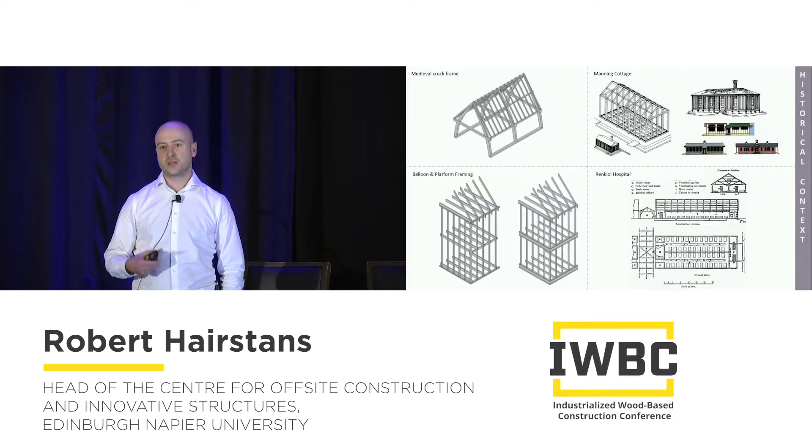Those drivers have obviously moved on in a sense, but we still have cruck frames - we just have CNC machining driven by computer-aided design and computer-aided manufacture. We also have things happening like the tallest timber building, timber reaching new heights with engineered timber products and mass timber. We have robotic collaboration, we have AI, etc. And with robotic collaboration working with humans, it's actually pushing the boundaries of the structural engineering behind these systems and starting to challenge some of the regulatory drivers.

We have NorScot, at the very top of Scotland in Wick - if you know Scotland at all, that's up near John O'Groats. They've invested in virtual reality and augmented reality, and the reason for them doing so is in order to inform the client and the consumer as to what that final house type would look like. So digitization is obviously affecting the delivery modes of offsite and industrialized construction.

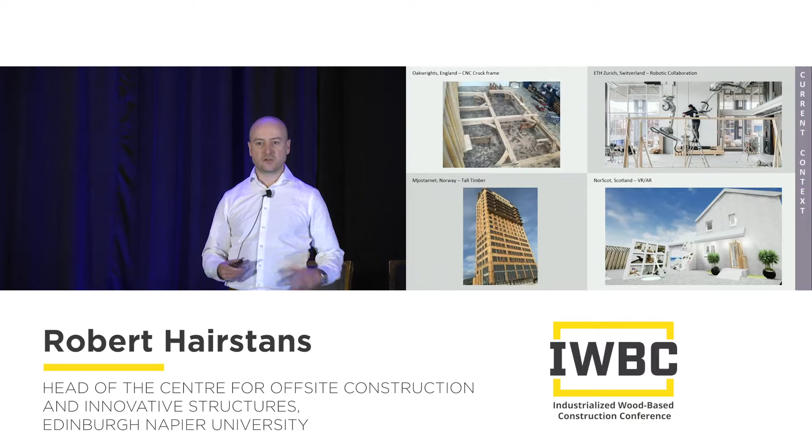So the drivers, in a sense, have changed over a period of time. Really interestingly, what we have at this moment in time is a swelling urban population and the need for housing and shelter with respect to that. It's been spoken of today in terms of the stagnation of productivity in construction relative to other industries. We have movements in that global market in terms of the growth, the potential growth of construction.

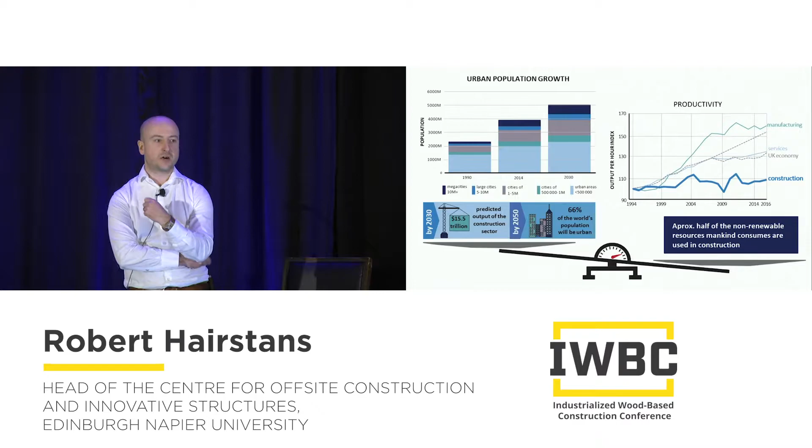But if we think of what that's offset by and the use of non-renewable resources, and ultimately what that would mean to the environment if that productivity actually went up, then what would that mean in terms of the future and our future generations? And I personally have young kids. So to my mind, we need to think about the tipping point, and we have to think about the utilization of natural resources and indeed timber and wood within the delivery of the built environment in order to sequestrate carbon, because it's fundamental to future generations and sustainability.

As much within the US, we have obviously what's happening in the UK. In the UK market, a 90 billion construction market. And in many respects, there's a government-driven agenda now behind off-site construction, and we can see some major investments going in that respect. We have obviously Sekisui investing, we have Top Hat, we have Legal and General, etc.

And the UK Construction Leadership Council has 3 focus areas in digital, manufacturing, whole life performance, which all resonate with industrialised timber construction. And obviously there's these 4 key drivers as well that the UK government are looking at with respect to that strategy 2025. And important to that is improvements in exports, and that's actually about reducing the import gap.

And then we have the Scottish context, which is quite interesting in response to that much larger UK market. And we have a historic backdrop of off-site construction and industrialised construction, largely focused on timber off-site construction, largely focused on panelised systems, and 85% of our houses are delivered in that manner.

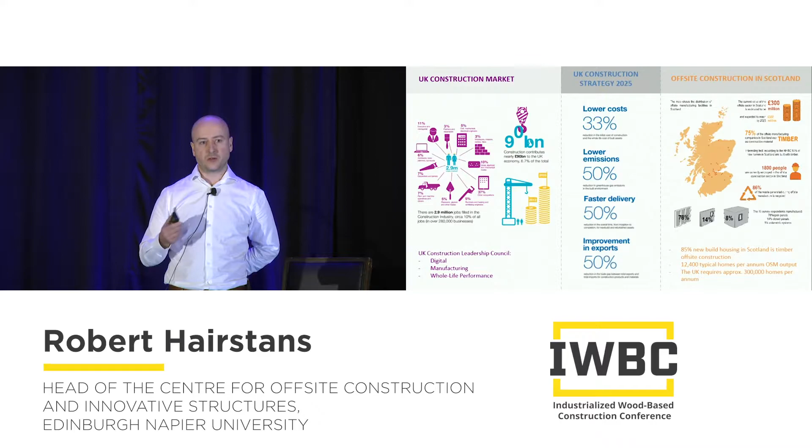So the key point I wanted to address there was the drivers now are slightly more complex. We have sustainability, the necessity to change construction culture to be less adversarial and to get more diversification. We need human capital and the skills that underpin it. We need to improve productivity, but we also have to think about the productive use of land and not just output relative to input. We have to think about digitization, and we have to think about the regulatory drivers as well,

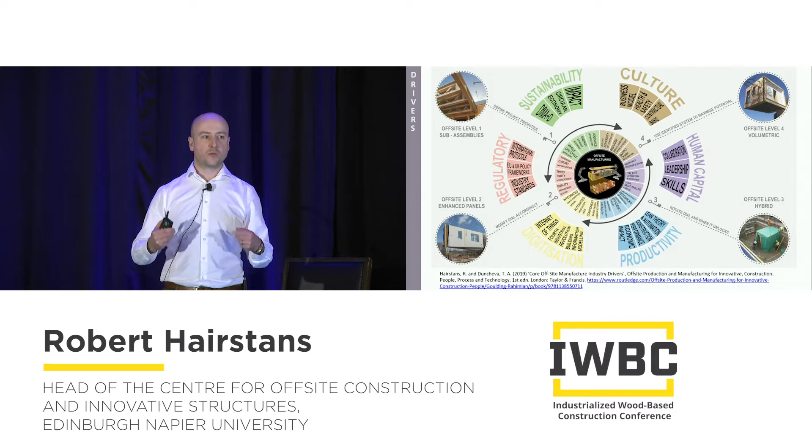and how those drivers correspondingly intersect and play out to the right form of construction, an off-site system, whether it be a sub-assembly, pre-manufactured, volumetric unit, enhanced panelised system, or indeed a hybrid type solution. So it's key that we think of those drivers and the intersect of them with respect to our decision-making process. So that's very much what I try to instill in the work that we do at Edinburgh Napier University.

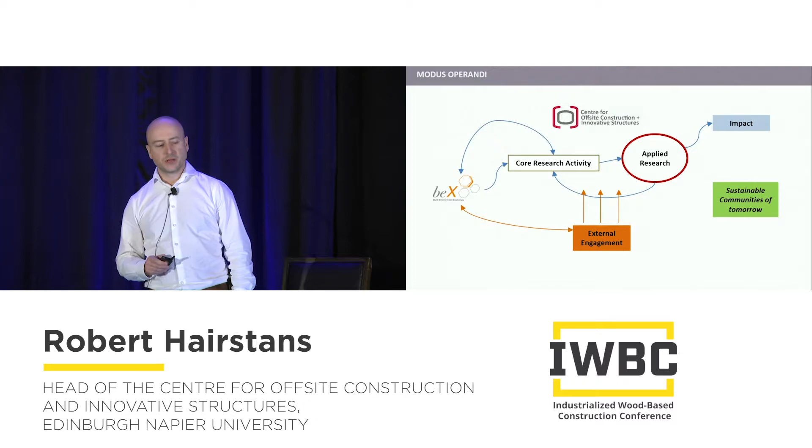And the research centre that I run is very much about applied research, creating impact to deliver these sustainable communities of tomorrow. But fundamentally, it is underpinned by student talent, because that is the next generation, and that's who will ultimately deliver that built environment. And we do that through something called a Built Environment Exchange, where we articulate students onto a program and then give them opportunities. And one of those opportunities is something we call Augmented Learning.

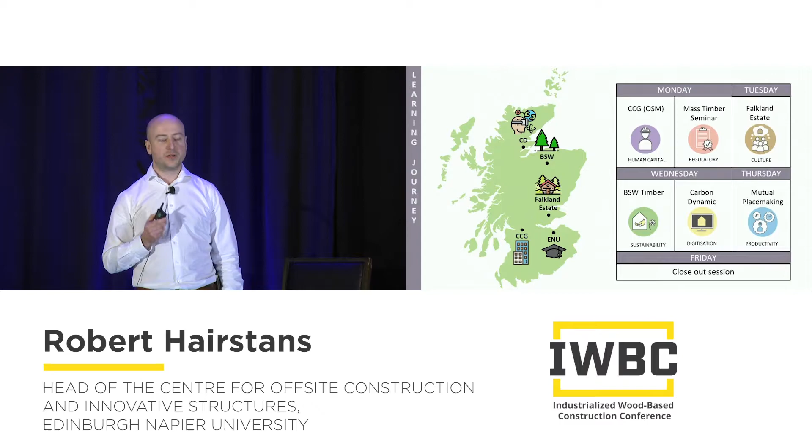And within that, over the last 2 years, we have collaborated with Harvard Graduate School of Design and their student cohort, and we've taken them on a learning journey throughout Scotland. And through that learning journey, we went to different destinations and focused in on each one of those drivers. So through the lens of each of the companies, we have looked at each of those drivers. So I'm going to take you through that learning journey pretty quickly, but hopefully I'll give you a sense of what they learned.

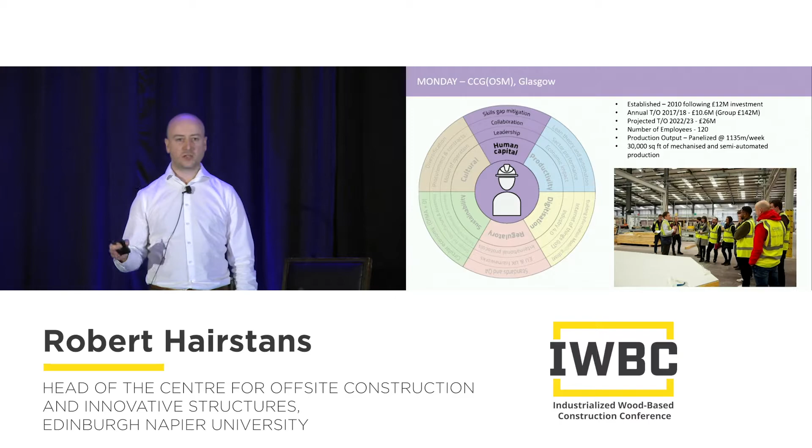We visited CCG in Glasgow, £12 million investment in off-site pre-manufacture, semi-automated mechanisation, and was taken around with one of my ex-students who's now employed there. We focused in on human capital because obviously they're looking to increase their output relative to the market. And with respect to that, they obviously recognise the necessity for skills from the factory floor to leadership at the top.

And they worked with us in collaboration with one of their competitors in Stewart Milne Timber Systems and developed skills material in partnership with ourselves to address both the factory floor and also on-site installation through video and animation content and creating modules. We recognise the need to push that out wider into the community and correspondingly created generic learning content which was endorsed by the Royal Incorporation of Architects in Scotland.

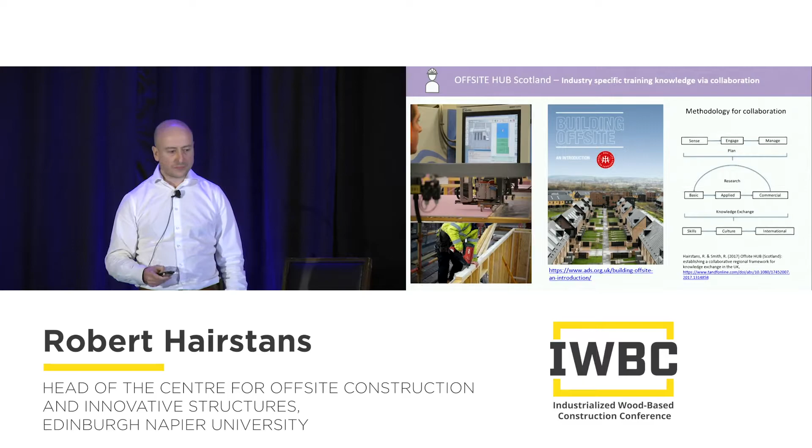Fundamentally, what was key within all of that, though, was really that collaboration, and we developed a methodology for collaboration. And where that methodology took us was, as Art spoke to, the creation of Offsite Solutions Scotland, which is a cooperative of off-site operators, all industrialised timber construction, the length and breadth of Scotland collaborating towards scale.

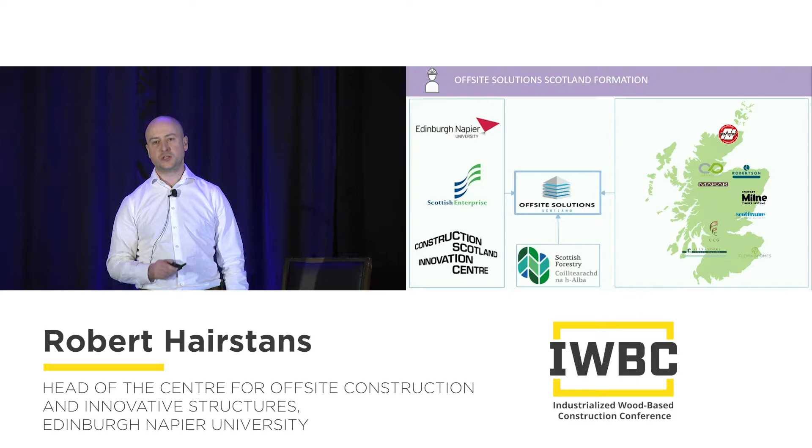We're academic lead. It links in with Scottish Enterprise and the Construction Scotland Innovation Centre and creates opportunities for further supply chain integration. As part of our visit to CCG, we also visited a site in Riverford Gardens.

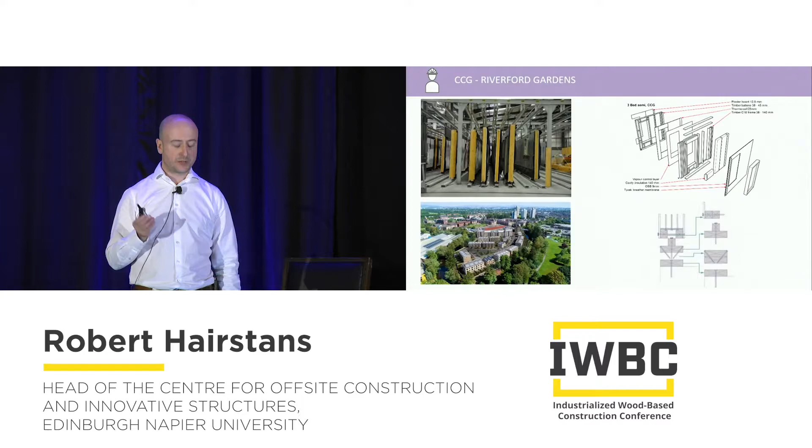And in this instance, still on this skills piece, we're actually looking at the harmonisation of the new regulations, the European Code of Practice, and the standardised detailing that we created working with CCG to allow closed panels to be received on the site while still ensuring that those systems could conform to the stability requirements, i.e. Eurocode 5.

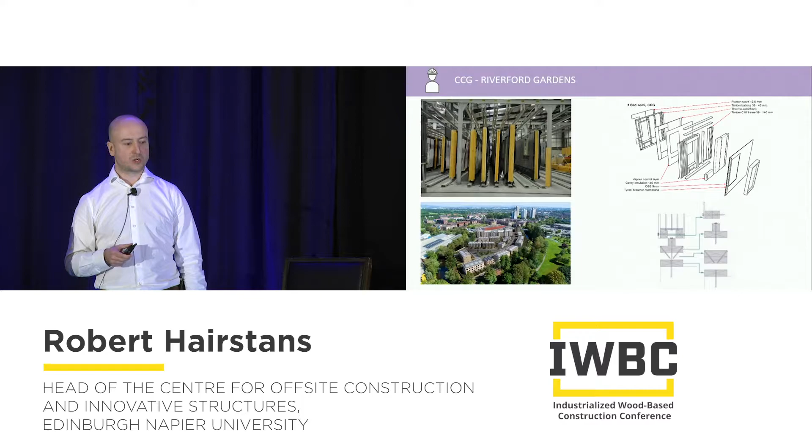So you can see some of the standard details that were evolved, and you can see those coming off the production line. So that was the first case study. That's Riverford Gardens. It's a 3-bedroom semi-detached house type in Glasgow.

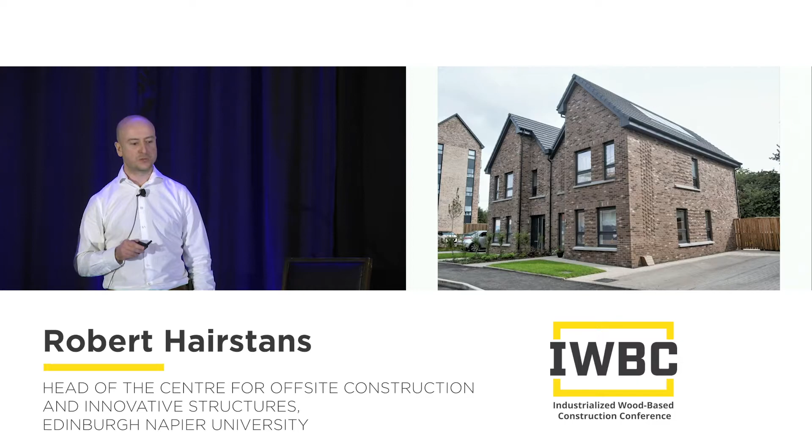We then returned to Edinburgh, and we had a mass timber seminar. And CCG, again, were one of the key delivery partners behind Yoker, the tallest timber building in Scotland, of a mass timber solution.

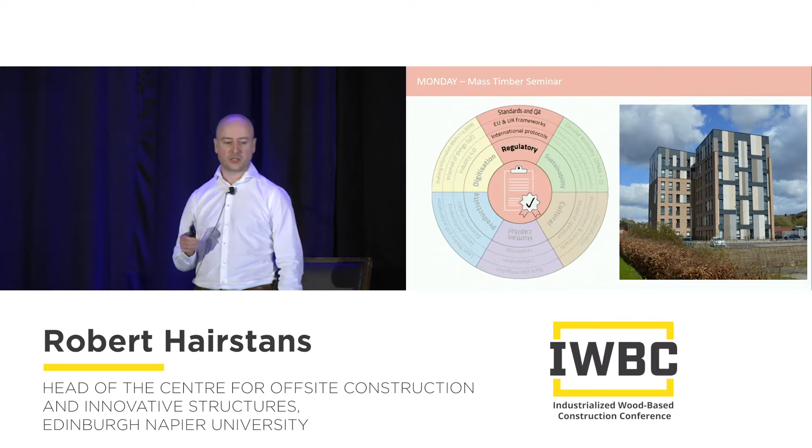But in this instance, the mass timber seminar in the first instance was more thematic, where we wanted to cover the generic content around mass timber systems, and not just look at the glued systems of CLT and glulam, but also look at the non-glued systems of dowellam or brettstapel, and how you can use the moisture movement in dowels to lock together lamellas to create a structural system, and also look at things like nail lam as well, which uses aluminium nails to facilitate CNC machining.

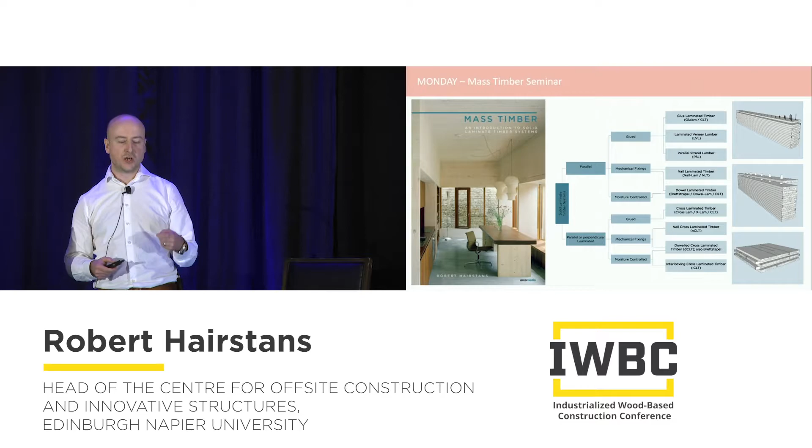So we covered all these different products, and hopefully informed the students as to how these different products could be utilised for varying contexts relative to the quality assurance and performance attributes. What we further did was then zone in using, again, case study content.

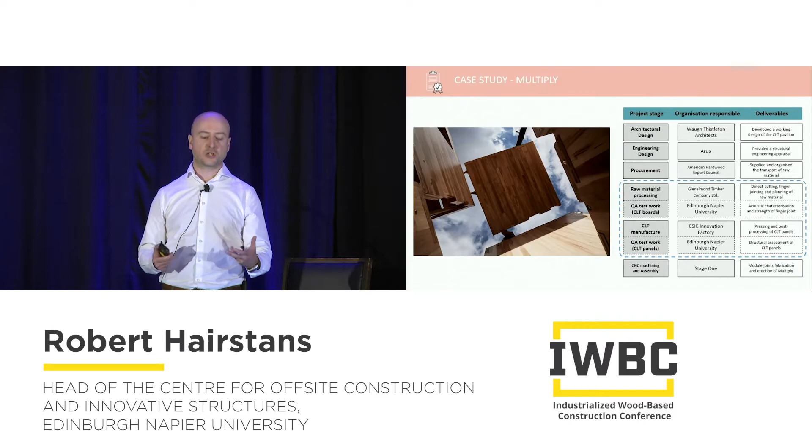And in this instance, we looked at a project called Multiply, American Hardwood Export Council, and the utilisation of tulip wood for Multiply. That was a Waugh Thistleton Architects-led design project with Arup Engineering. But interestingly, it was a Scottish supply chain that carried out all the product pre-processing of the material, the manufacturing of it at the Construction Scotland Innovation Centre, and we undertook the quality assurance test work.

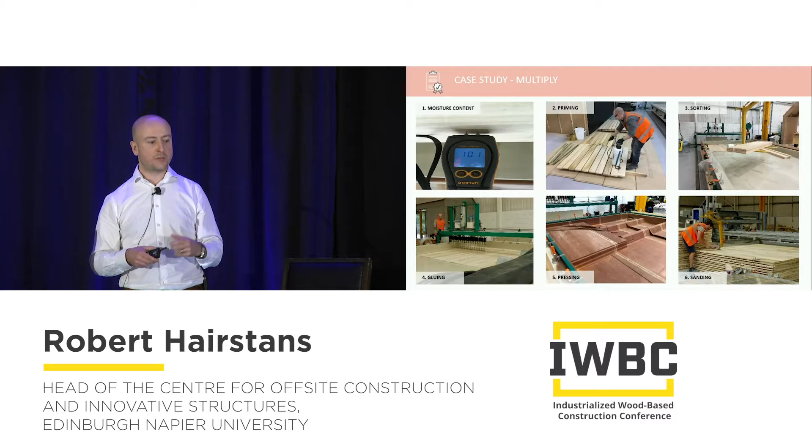So at the Innovation Centre through in Glasgow, they have a vacuum press, which allows not just CLT to be made, but other bonded timber systems such as glulam, because of the flexibility of it. And our role within that was to ensure the quality assurance of the material: the moisture content of the lamellas relative to each other, and also the grading of the material as it's being utilised within it, and overseeing things like priming of the hardwood species to allow the bonding to take place.

Once these panels were manufactured, we took a subset of that material, and we carried out a series of tests to ensure the finger jointing was of strength requirements, the bond strength, including rolling shear, bending out of plane and in plane, and then we compared that relative to the European product, and you can see how the tulip wood CLT compares to the standard European product for in-plane bending, i.e. when it's acting as a beam.

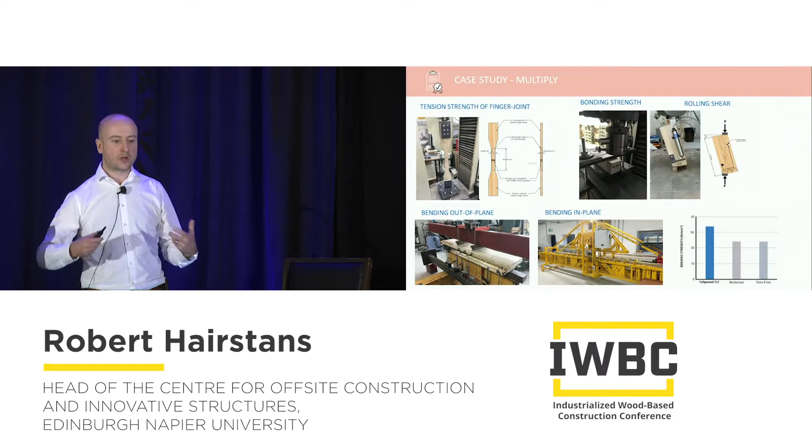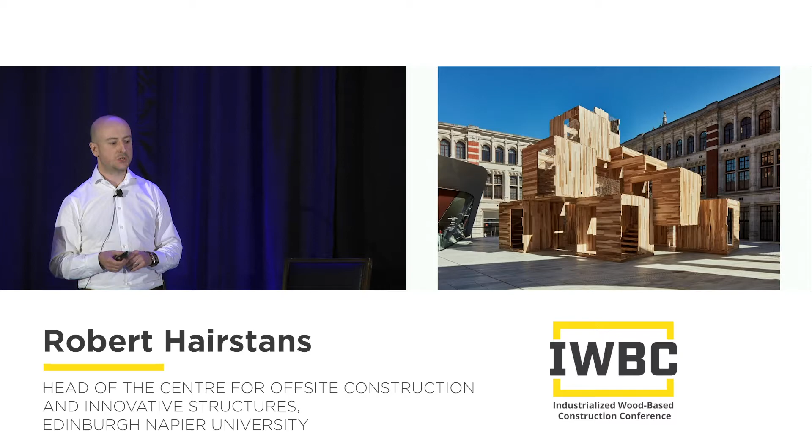And obviously all of that content then informed the second case study for the GSD students. So they got informed of all the technical attributes that sat behind it.

The next step on our journey, we travelled north. We went up to Fife. And in this instance, we wanted to look at the cultural driver and the cultural aspects of construction. And Falkland Estate is a really interesting culture. So Falkland Estate in Scotland is where Falkland Palace is. It's a 16th century building, stone built, I must add.

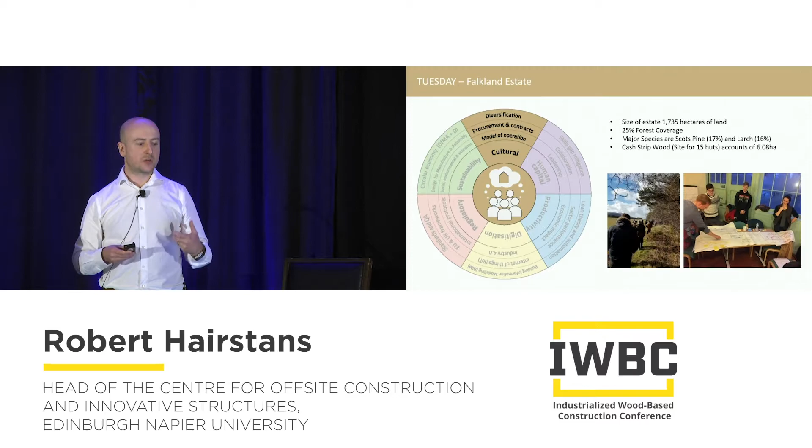But what's interesting about Falkland Estate is they're looking at a community ownership model, and within that community ownership on the estate, looking at the delivery of their built assets using the local timber resource. So they have a timber resource there, and how it could correspondingly be used to deliver their built assets.

And some of those built assets on that estate are to be off-grid recreational units, bothies in the Scottish terminology, or huts. And that's a simple form of accommodation, only to be used for recreational purposes, internal floor area under 30 square metres, and correspondingly has relaxed planning consent and building regulation requirements. So they're relaxed in order to allow these to be built without full planning approval.

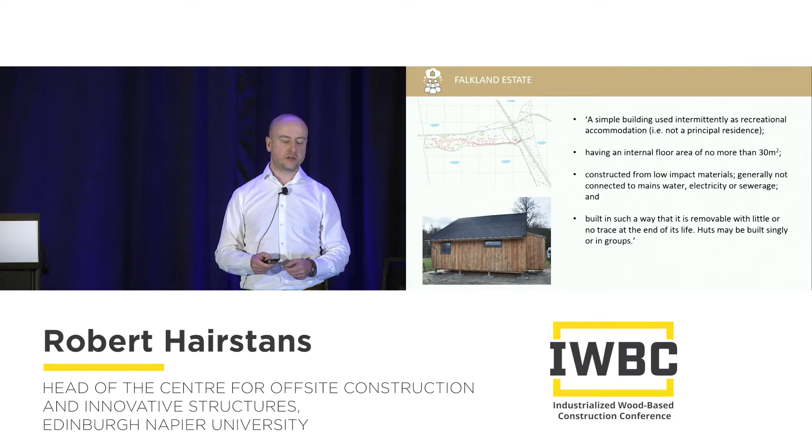And Ninian Stuart, who's the trustee of Falkland Estate, is very much behind this in a movement in Scotland to introduce 1,000 huts around the Highlands and other off-grid, shall we say, areas.

So our innovation intervention with this particular project was to create a digital model of the hut and a building information model. So using SketchUp, we had students through the Built Environment Exchange process create that building information model using SketchUp supplied by Trimble, as I say.

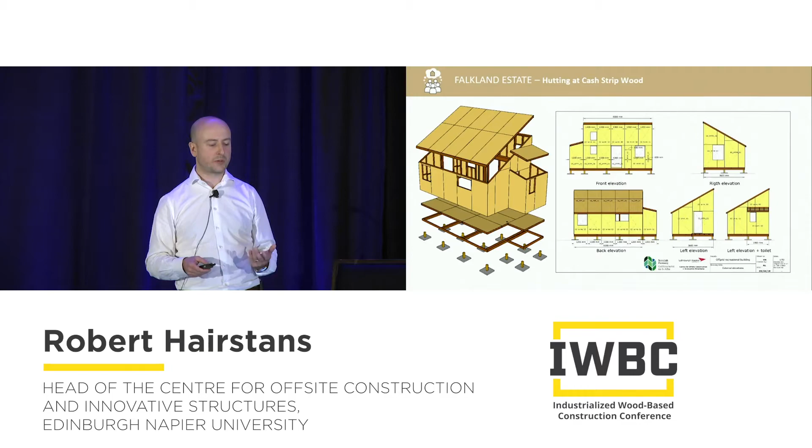And why that's really useful is it allowed our students to then create panels to articulate the panels for that fabrication. Because these huts ideally have to be erected on site by unskilled workers, i.e. the public, who want to have a recreational hut.

So if you can pre-manufacture the kit of parts off-site. The work that we did within that building information model was to put simple things like the density of the material in there, so you could understand the individual weights of these panels to facilitate manual handling. So they're under 50 kilos individually. And we also worked on the detailing of them to allow those parts to come together in a simple manner.

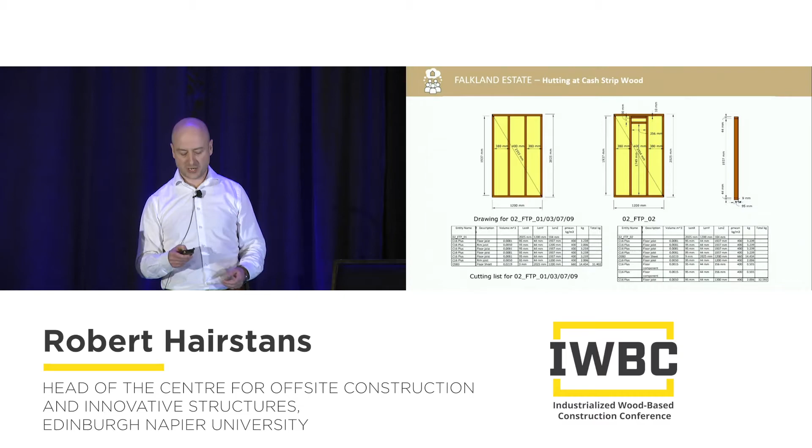And once they're erected, the individual can customize that through what types of insulation, internal lining, and external cladding. So mass customization in effect through a standard kit of parts. So that was the third case study of the GSD students.

We then traveled further north and we visited BSW Timber. BSW are the largest sawmiller operating in the UK, and they also have sawmills in Latvia. We wanted to go there to really focus in on sustainability, because there's not many industries that really have a zero waste policy, and that's exactly what BSW Timber do as a sawmiller. So they don't waste anything.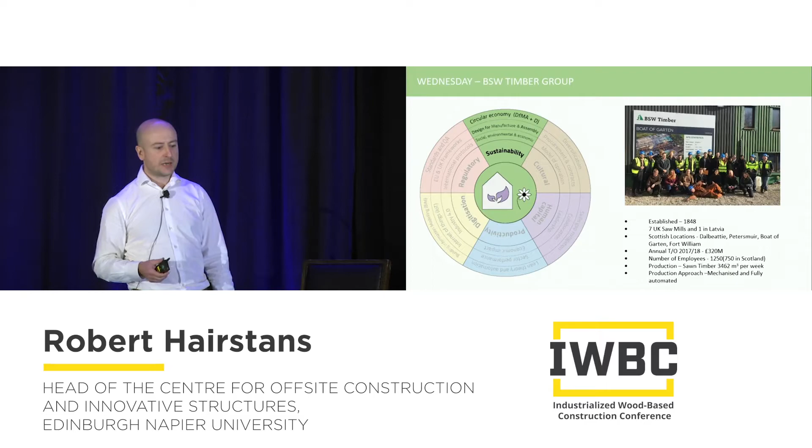So we wanted to take the students there so they could understand the industrialized processing of logs and how those logs are then turned into products without wasting any of the resource, and at the same time planting more trees than they're removing. BSW took the students around the sawmilling facility so they could understand the fullness of the supply chain.

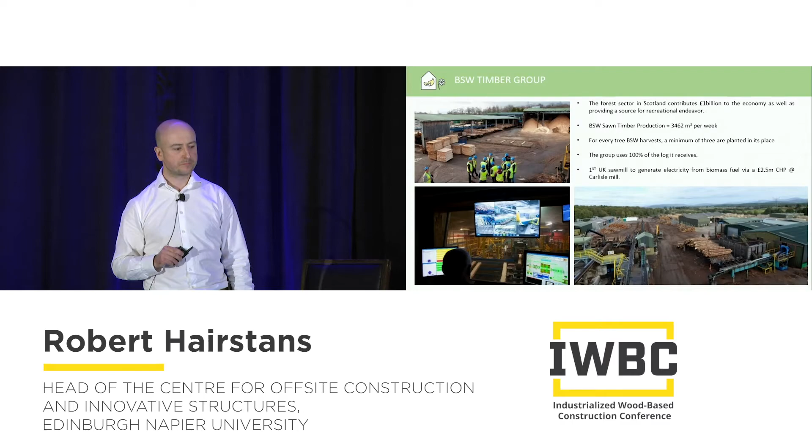What's useful about that as well is that BSW are representative of the UK timber market. And in that regard, what we're able to understand is the level of material that's utilised from the sawmill into construction. A lot of the work that we do at Edinburgh Napier is to try and enhance that 20% margin in order that more timber is used for construction purposes.

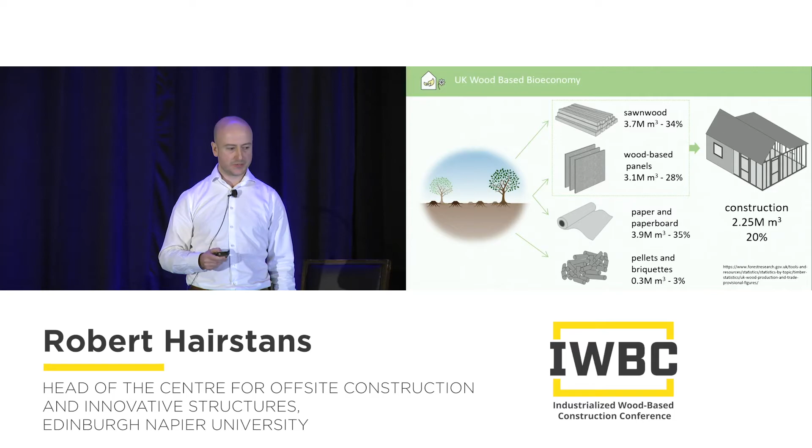And a large reason why we do that is because that chimes with the paradigm of the circular economy. Because evidently, the more timber that we can utilise in the built environment, carbon can be sequestrated for longer and locked in. And it's really at the end of life that we should be thinking about the utilisation of timber to generate power. So as much of that material that we can lock into the built environment, to my mind, the better.

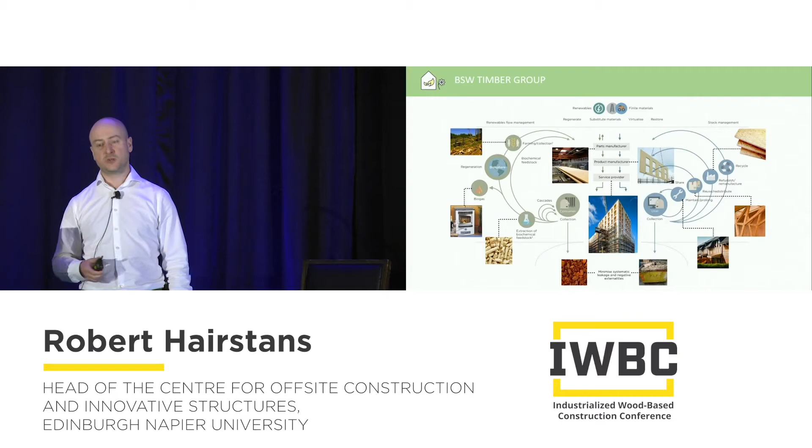So a lot of the work that we do with the sawmills is to facilitate how they can move forward into the circular economy. And what that requires is, once you have the sawn timber, to take into consideration design for manufacturing assembly, and of course disassembly, such that you can reuse that material at end of life.

So in this respect, what we've been doing a lot of, with colleagues at Edinburgh Napier, is to look at our resource and what limits its use. And often what limits its use is the preconception that it's of perhaps lower quality than imported resource. Our resource is generally stiffness limited in terms of grading criteria. But although it's stiffness limited, it actually has a higher density and higher strength properties within that grading class.

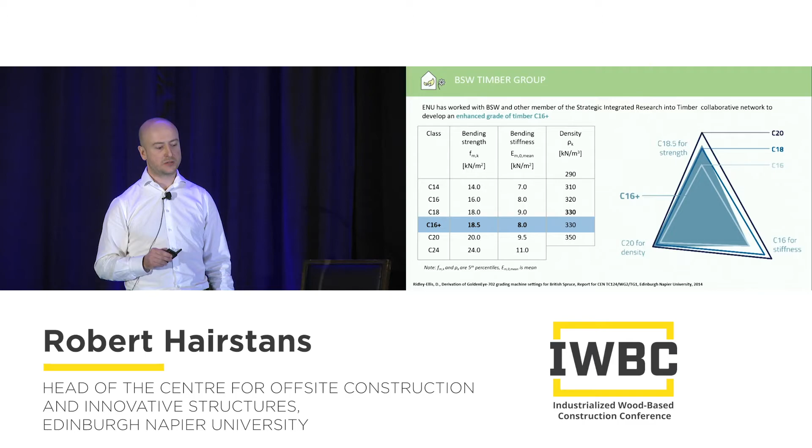And if you think about timber design from a structural standpoint, it's often connections which limit the performance of the system. If you have a higher density, then you have a higher strength and stiffness of your connections. So if you can utilize that higher density within your design, you'll get an uptake in performance and correspondingly a better utilization of the material, so further optimization. Hence why we've been undertaking work in this regard. And C16 Plus is now a recognized grade of timber within the UK.

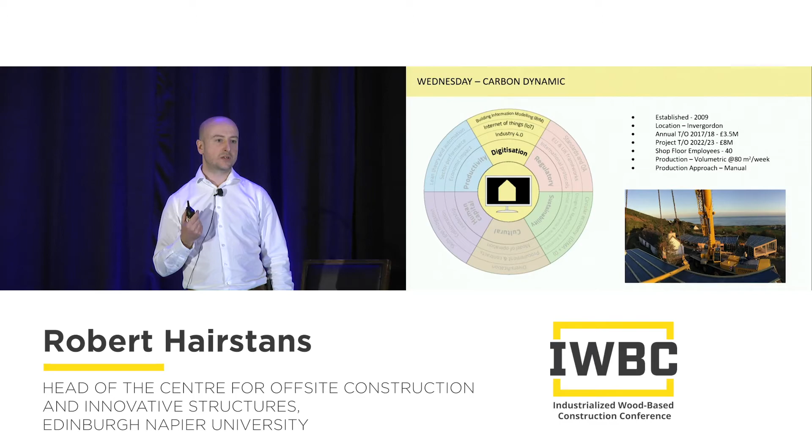Moving on from BSW Timber, we then went further north to Carbon Dynamic, a volumetric CLT manufacturer. In this instance we wanted to look at digitization, and we got the opportunity to understand the work they undertook to deliver the Dyson Institute of Engineering and Technology, and how standardized volumetric CLT units were used in an array of 78 modules to create their student accommodation block.

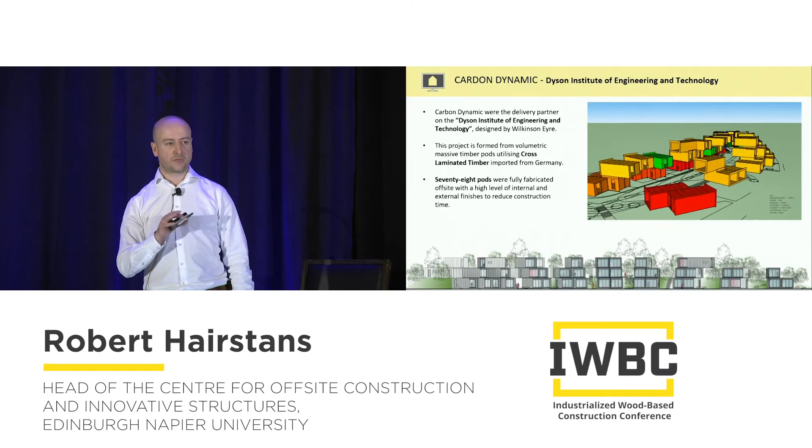Our students, through the BIM process, were able to draw these in SketchUp and create an animation of how those modules were utilized within the site. The different colors designate the different use classifications, with yellow being the accommodation units.

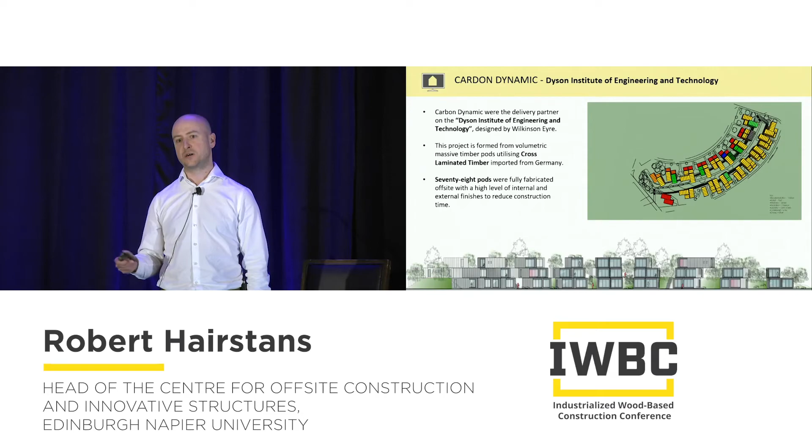Interestingly, Carbon Dynamic have further enhanced these digital modules to the extent of virtual reality and augmented reality, taking that on board towards augmented worker. So again, there's a skills context to it.

The work that we did with Carbon Dynamic in this instance was a lot to do with the necessity and want to cantilever these volumetric CLT units, and correspondingly push the boundaries of even where the regulations would allowably take it.

So what you're seeing there is a sort of student party in the bathroom, where you've got a whole series of individuals piled up, creating quite an extensive crowd load. What was needed was to understand what that would equate to in terms of deflection for serviceability criteria.

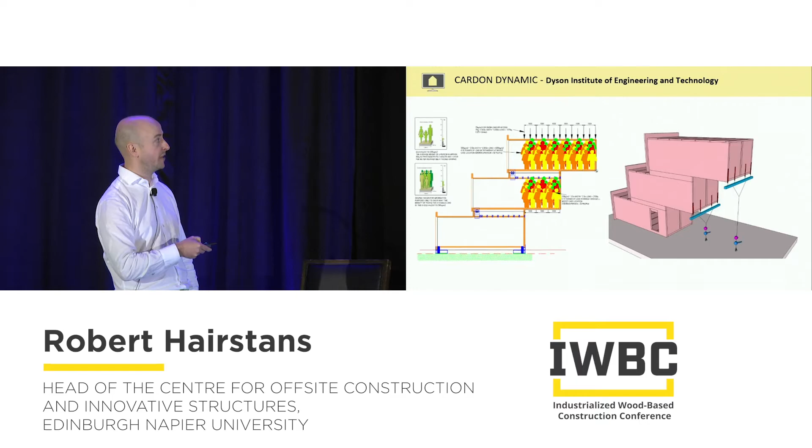So in order to do this, what you see on the right-hand side was to model that, then think of it in terms of point loads at the end, and create a test setup where you could apply a ratchet to the end of the cantilevered box to understand what that deflection would be. The reason why we did that was because they then undertook a full-scale test of the system.

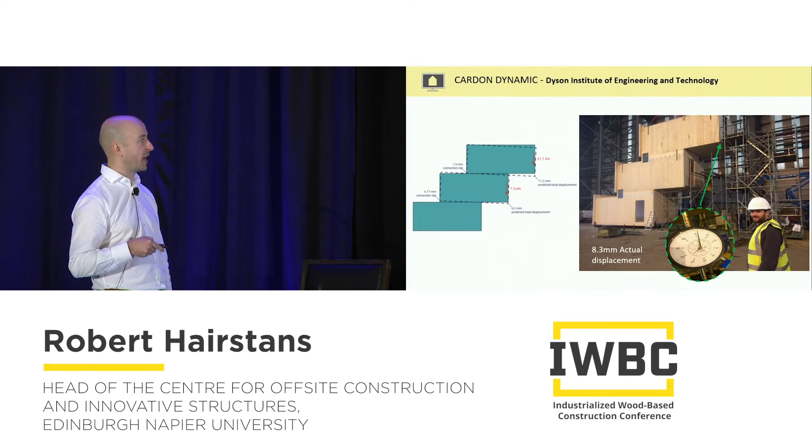You can see one of our proud students stood there, Rory Doak, who undertook the modelling of the system under our supervision and support. We were able to correlate, through dial gauge measurements, the actual deflection relative to the predicted deflection. So in that respect, you're able to create a feedback loop to the digital model to understand the structural attributes.

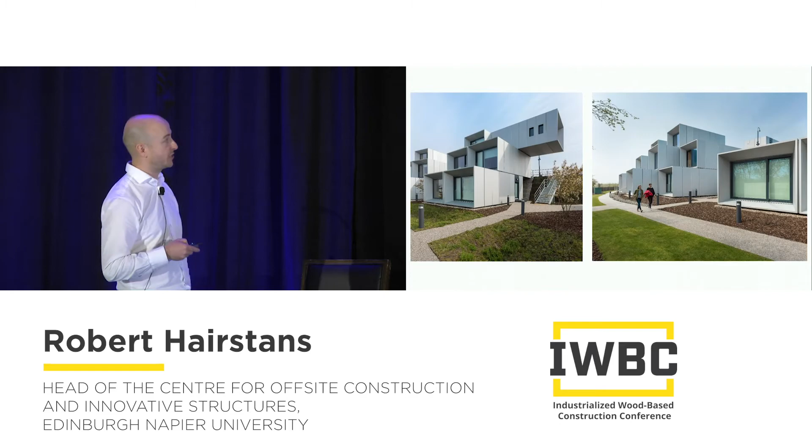And then you can see the fourth case study, which was taken on by the Harvard GSD students, in the Dyson Institute of Technology project. You can see quite categorically that the cantilever is working.

So we've touched on productivity, and that was very much the last leg of the tour. This time thinking of productivity slightly differently, about productive use of land. In Scotland, we have a lot of vacant and derelict land sites, which happen to be in urban areas. So it's about how these brownfield sites or discarded sites could be used for productive use.

There's 12,000 hectares of vacant and derelict land sites, or 3,600 of them. There's a task force in Scotland, which I happen to be part of, geared towards trying to halve the number of vacant derelict land sites and bring them back into productive use, so we're not eroding the green belt all the time.

And the vacant derelict land site that we looked at was right in the heart of Edinburgh. If you know Edinburgh at all, that's the Royal Mile, which takes you up to the castle and down to Holyrood Palace. Here is the main train station, and in here is the vacant derelict land site, situated directly behind a hotel.

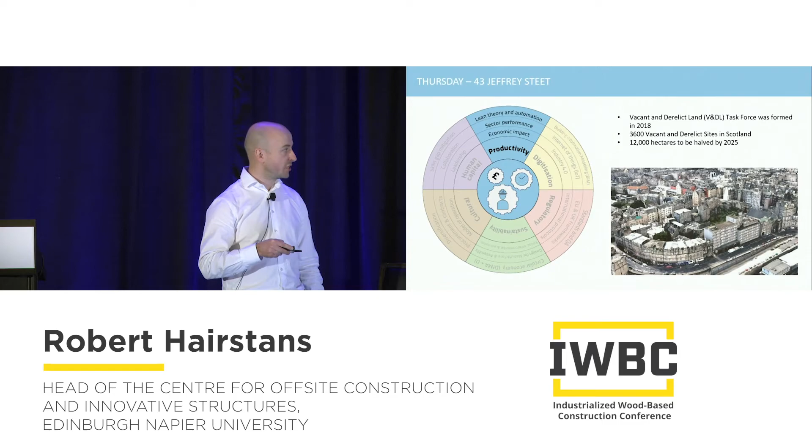So I had logistical challenges. But what we did was conduct something we call mutual placemaking. That's an immersive workshop working with our creative industries department, where our students and the GSD students undertook a design thinking exercise.

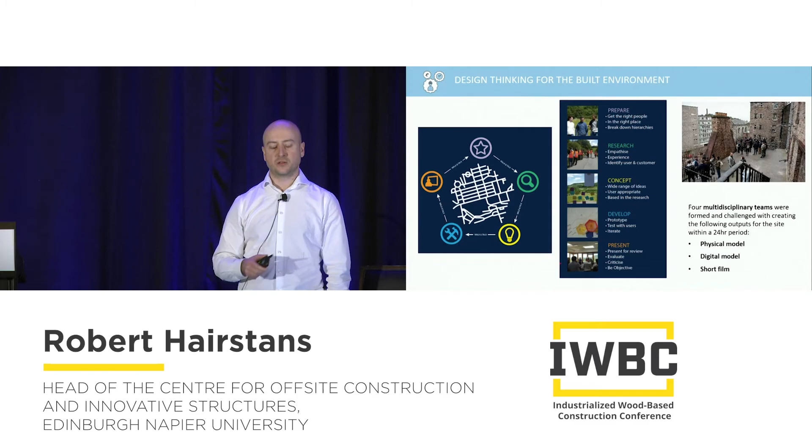What's key to that is community engagement right at the start, in order to inform the design solutions. We challenged the students, over a 24-hour period, to create a physical model, a digital model, and a short film of what could be done on that site to bring it back into productive use, bringing together architects, project managers, structural engineers and civil engineers right at the start with the community to evolve those solutions, utilizing the learning from the week.

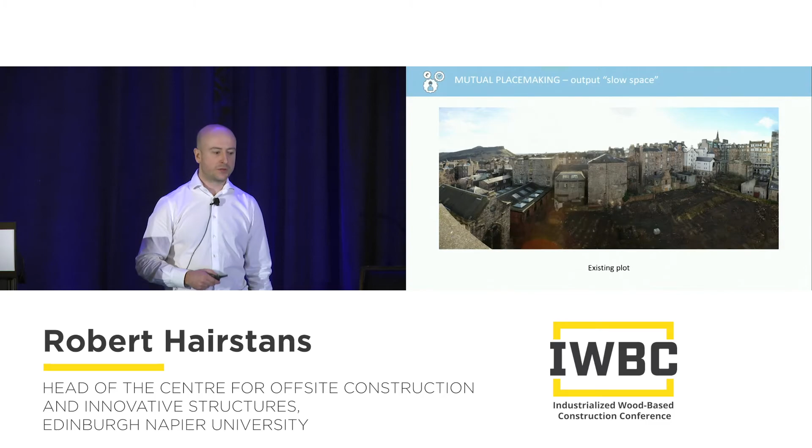So in that respect, the students rose to the challenge and indeed came up with some solutions. What's quite apparent here is, as much as it's in an urban context, there's a lot of green space that's been kept around it, because that's what was being spoken of from the community engagement piece. But of course, using off-site modular timber construction units for the delivery of that.

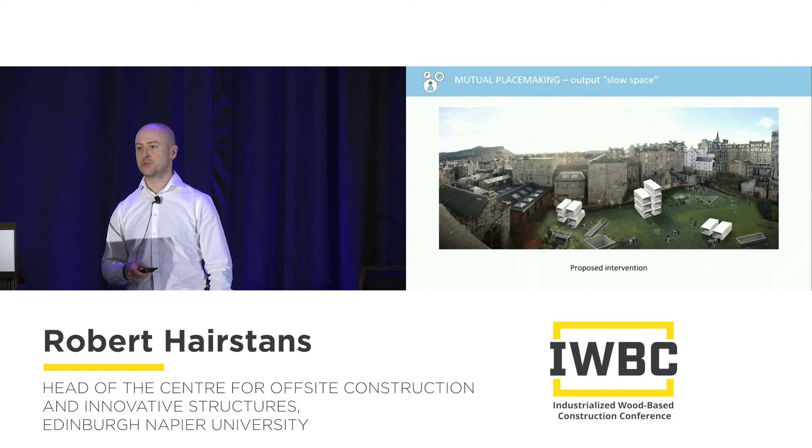So I think what was really useful from the week was looking at each of the drivers through the lens of the different industry partners and thinking about how industrialized timber construction and off-site construction can respond to it.

And from that, what we really see is industrialized timber construction can provide a clean tech solution to the delivery of the built environment. I don't think we would disagree with that. Culture of the built environment should be created in a manner which delivers sustainable communities and wider cultural impact. So thinking about the social ramification of what it is we want to deliver in the future.

A digital thread can be realized from forest floor to built asset with a feedback loop for continuous improvement within the realms of lean. I think in terms of regulations, a lot of our innovation is almost driven by regulation. So regs actually pull the innovation through the system.

How can we reach the next level of thermal requirement of the building envelope? But why isn't our innovation actually driving where the regulations are being set? That's something that circles back even to what they're doing in Vienna with the robotics and how that's challenging structural codes of practice.

So there's scope for that. Productivity, not simply thinking about it in terms of increasing output, because we have to think about the generations of the future. And in terms of human capital, it's key to engage with the consumer, because in doing so, they can actually challenge what we want to do and, again, pull innovation through the system.

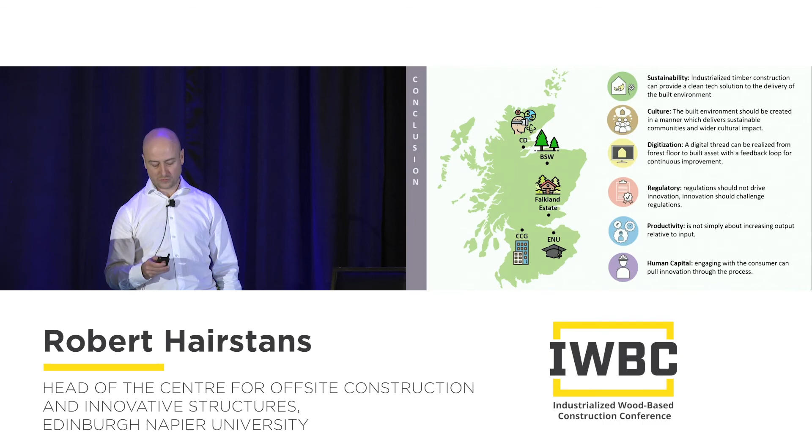So just to close off, what I would say is the exhibition content that's outside with the GSD students have done an admirable job in producing. We've also produced exhibition content which is displayed in Architecture and Design Scotland.

And if you go to the boards that are outside, there's QR codes. So if you scan the QR code, you'll get further information on the projects. And indeed, our exhibition is digitally enabled, and a large part of that is to try and engage the wider public with what we're doing.

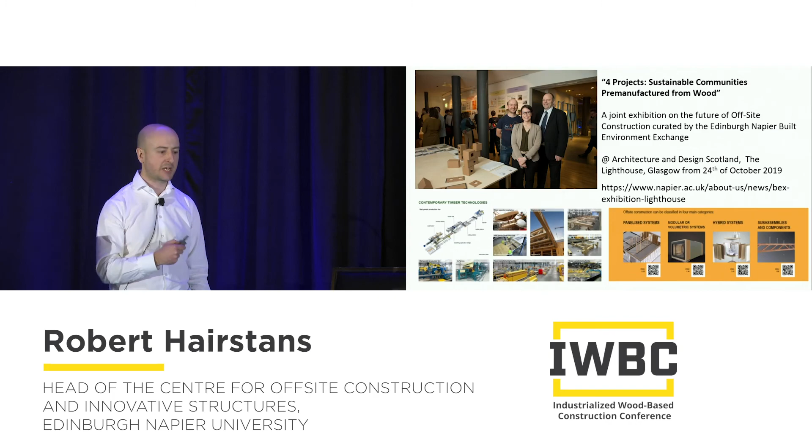We have to tell them what we're doing in order that they want what we produce at the end of the day. So that was absolutely key for us in terms of an output from this process. And that exhibition will be there until the end of January.

The case study content will also be included in a forthcoming book. And again, a shout out to Peggy for helping with some of the content for that. Shout out to Ryan for his help in reviewing it, and also to Ivan for the case study on Japan. So thank you to those guys.

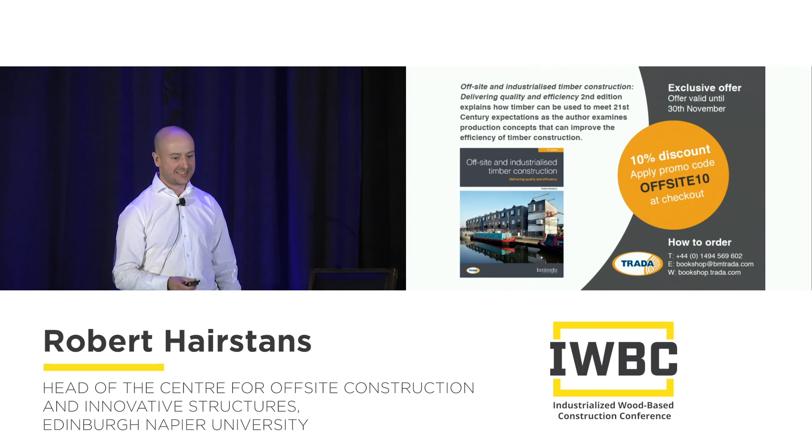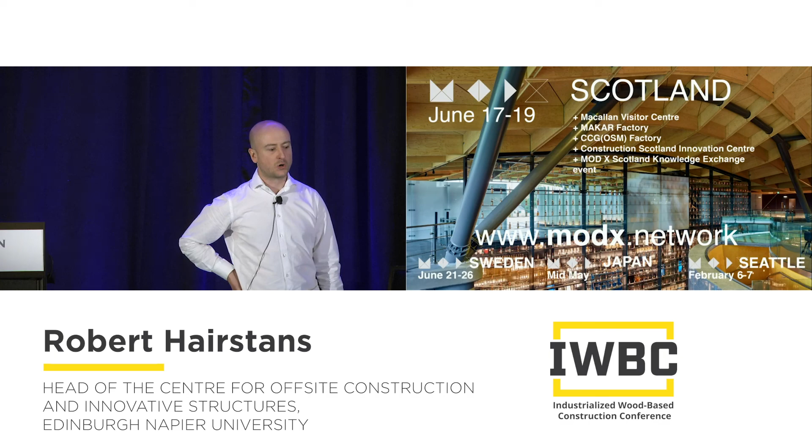Okay, and then just my final slide is to say that if you want to learn more about what we're doing in the Scottish context, then working with Ryan and Ivan, we're looking at a ModX tour of Scotland. And yeah, I don't think we need much more of an invitation rather than to say that on that tour.

The intention would be to visit the Macallan Visitor Centre, which is a whisky distillery visitor centre that was pre-manufactured from wood. So I think if we could think of a possible better use for timber, then it probably is whisky barrels. And if you buy an older malt whisky, those whisky barrels have been sequestrating carbon for longer. So there's probably a few things we could learn over a dram in Scotland.